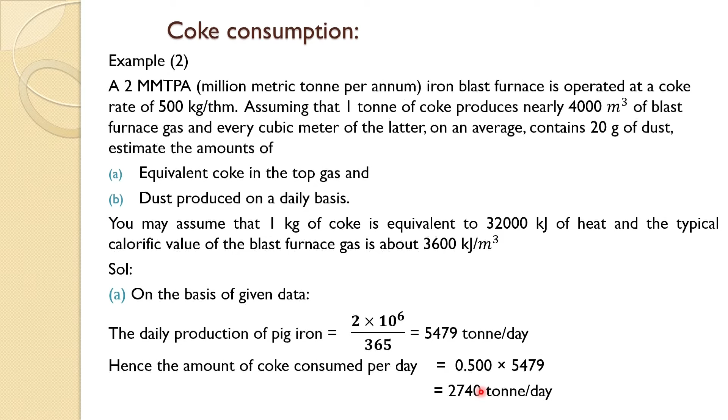So, the amount of coke consumed per day is about 500 kg, which is about 0.5 ton, into the daily production of pig iron, which will come to about 2740 tons per day. And now it is given that 1 ton of coke produces about 4000 meter cube of blast furnace gas. So, 2740 ton will give you about 11 into 10 to the power 6 meter cube blast furnace gas. And it is given that 1 meter cube blast furnace gas has a calorific value of 3600 kilojoule. So, the total calorific value of this blast furnace gas on a per day basis would be quite high, 3600 into this.

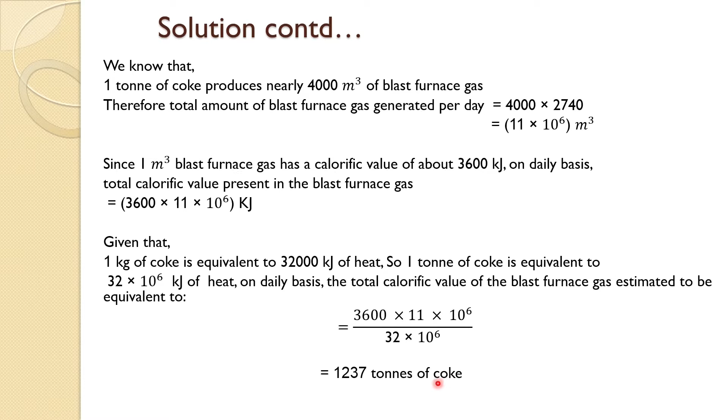Now, 1 kg of coke is equivalent to 32,000 kilojoule of heat. So, 1 ton of coke would be equivalent to 32 into 10 to the power 6 kilojoule, since 1 ton is about 10 to the power 3 kg. So, on a daily basis the total calorific value of the blast furnace gas can be estimated. It would be 3600 into 11 into 10 to the power 6, the gas which we are getting, divided by this equivalent heat. So, it gives you about 1237 tons of coke per day for the blast furnace.

And if we assume the current price of coke is about $250 per ton, the cost of it would be 250 into 1237, and if we convert dollars into rupees with an exchange rate of 60, it comes to almost 19 million Indian rupees or about 0.3 million US dollars. So, that is a huge amount. So, a small saving in this can result in a big saving in price, and that is why people are trying to decrease the coke consumption or save it.

Now, if we come to the blast furnace gas which is generated, we have already calculated 11 into 10 to the power 6 meter cube, and it is given that 1 meter cube of blast furnace gas generates about 20 gram of dust. So, the total dust would be 20 into 10 to the power minus 3 kg per meter cube, converted into tons. So, it will give you about 220 ton per day. That is a huge amount of dust generated in a day.

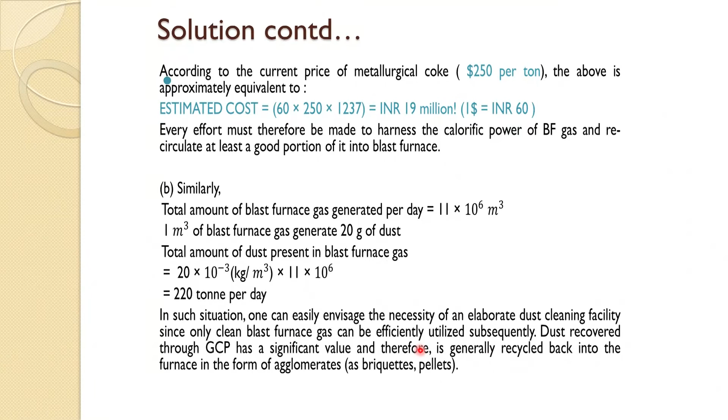You can imagine now how much dust: if we take just a very minuscule amount, 20 gram, you are generating 220 tons just from that blast furnace, and you need a very elaborate dust cleaning facility for that. And this dust you cannot just throw away; it has value, quite a lot of carbon and mostly iron ore. So, you have to use it, and that is where the agglomeration process comes into the picture. So, we will come to agglomeration.

So, we had mentioned before in this course that about 50% or more fines are generated from mining to the blast furnace in transportation, crushing, grinding, and beneficiation. All these lead to more than 50% fines generation, and they cannot be used directly in the blast furnace, as they would adversely affect the burden permeability in the blast furnace, and thus the furnace operation and its production.

Another reason is the depleting reserves of traditional high grade iron ore; there have been considerable changes in iron ore resources available throughout the world. The proportion of fine material has increased considerably in iron ore. So, now we are really dealing with more and more fines than lumpy ore. So, we have to switch to the agglomeration process, because these fines cannot be used directly.

So, therefore, ore fines are agglomerated to make them suitable as ore feed to the blast furnace, and there are two processes for this: one is sintering and another is pelletization. Sintering is restricted in its size range. So, when the size is 10 millimeter or less, down to 2-3 millimeter, you can go for sintering.

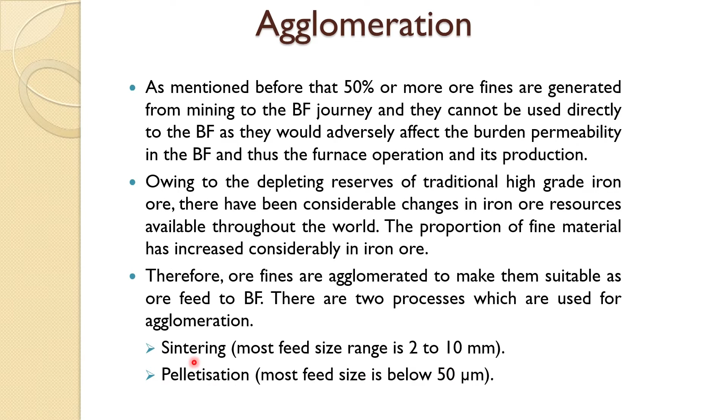So, we will come to the sintering. Sintering of iron ore is a very complex process in which various phenomena take place, such as evaporation and condensation of moisture ahead of the flame front, calcination of limestone near the flame front, coke combustion in the flame front, and melting and solidification.

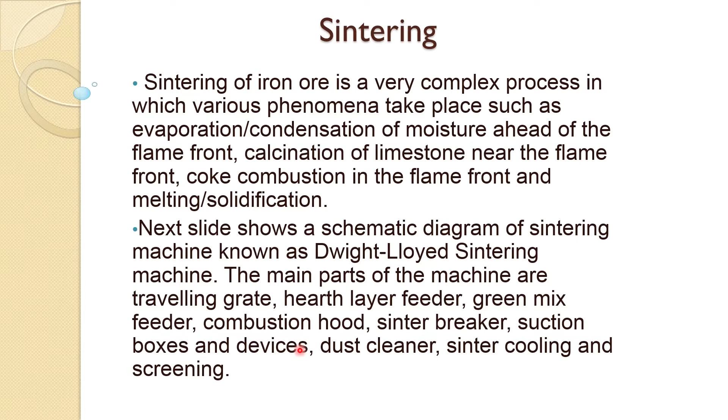The next slide shows a schematic diagram of a sintering machine. The main parts of the machine are the travelling grate, hearth layer feeder, green mix feeder, combustion hood, sinter breaker, suction boxes and devices, dust cleaners, sinter cooling and screening. So, this is a moving grate sintering machine.

So, we feed the raw material. We will describe each of these separately, but before we go to these separate things, it is necessary for you to understand the sintering process and sintering machine. Then you can correlate what we are talking about, whether the raw material, the sinter strand, the mixer or granulation, with the actual sintering process.

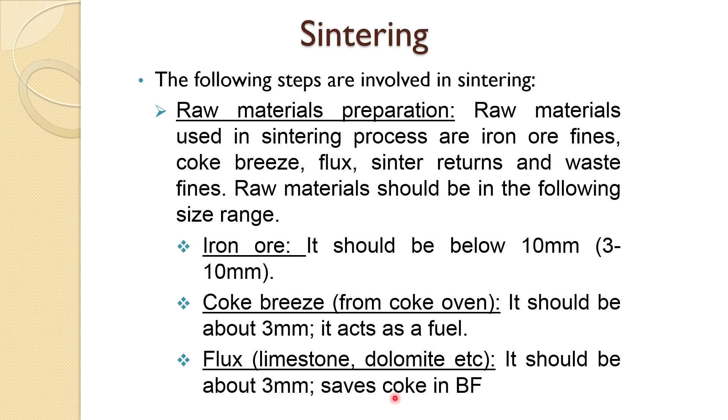Waste fines: these are the flue dust, sludge, etc., and again it should have a size of 3 to 4 millimeter. Because these are really fines mostly used for pelletization, but if you want to use them for sintering, then you make a little micro nodule form of this and make sure it is in this range. Then sinter return, as we have seen, the below 10 millimeter goes to the bin as raw material.

The next stage is the mixing and granulation. This is a very important stage in the sintering, because that is where you are making the pellets of the right size. So, all the materials are mixed properly before the start of the granulation process. So, granulation or pelletization: water content should be between 4 to 9%, but usually about 7-8% they keep it.

Granulation is a complex process in which many input variables influence the product property, like particle shape, density, porosity, surface roughness, proportion of intermediate particles, surface area of the feed, mean feed particle size, and moisture holding capacity. There are others also. So, these are very important parameters in granulation. The idea of granulation is you have to get a narrow size range product, 10 to 12 millimeter, and a narrow range, because that will give permeability to the bed.

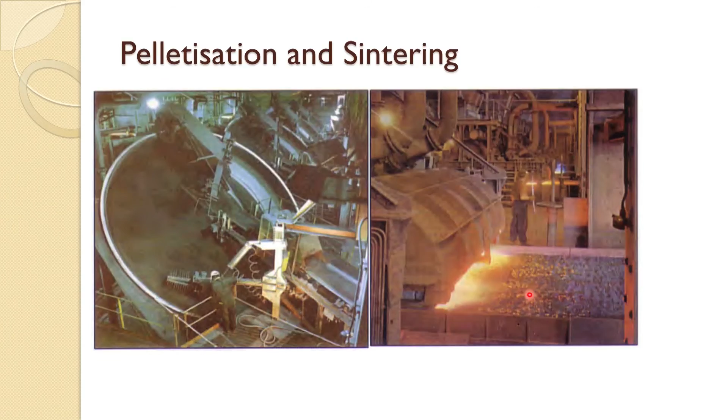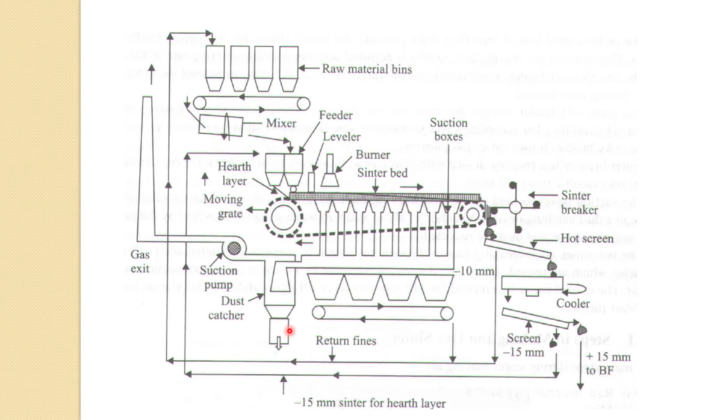If you look at this figure, when you are putting these pellets over here and the suction is being applied from the bottom, the bed should have a good permeability. If the bed does not have good permeability, your sintering will not occur in a proper way, and it will affect the productivity and efficiency. So, to make sure you have an optimum permeability of the bed, it is very necessary that proper granulation is done. The granulation process itself can be divided into two categories, wet granulation and dry. Usually in iron making we do not use dry granulation.

Granulation again is a process where you are making these fines in the form of nodules or granules of the size of 10 millimeter or more. These are used even in the chemical and pharmaceutical sector quite a lot, in drugs and tablet making. But here mostly we use wet granulation in iron and steel making.

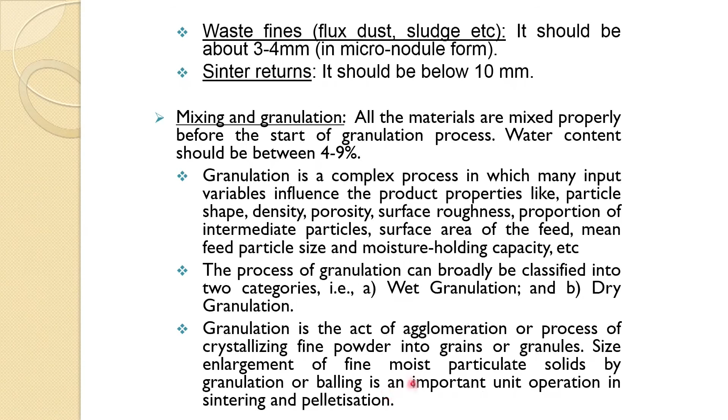So, granulation is the act of agglomeration or process of crystallizing fine powders into grains or granules. Size enlargement of fine moist particulate solids by granulation or balling is an important unit operation in sintering and pelletization.

Mostly the mechanism of wet granulation is snowballing, adhering the layer, coalescence, abrasion, transfer. So many mechanisms are there where you have a binder droplet, it could be water, it could be molasses or anything, and then surface tension and capillary effects come into picture, which finally bond together into a snowball type of structure in a finished agglomerate.

One of the mechanisms also says that the final granule size is directly proportional to the feed size, which can be given with this equation, where y is the granule size, the product, z is the feed size, and k is the proportionality constant, which depends on many parameters, moisture content of the feed and other things.

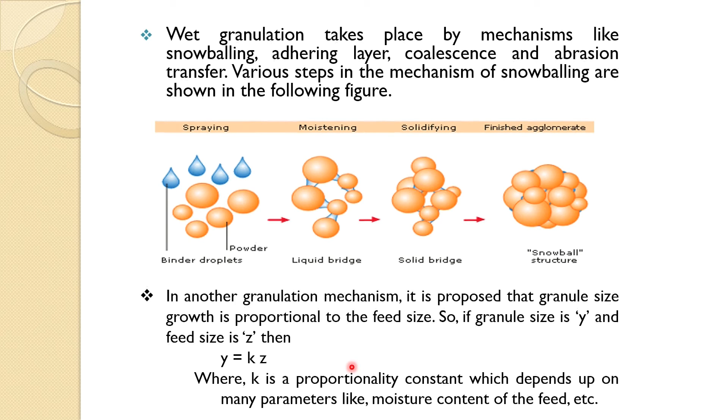So, there are various mechanisms, but there is no determined or established one which one can use confidently. Still, population balance is one of the mechanisms to describe the granulation process. The idea is to make as narrow a size range as possible from this granulation process, so the bed permeability can be improved and sintering can be done efficiently.

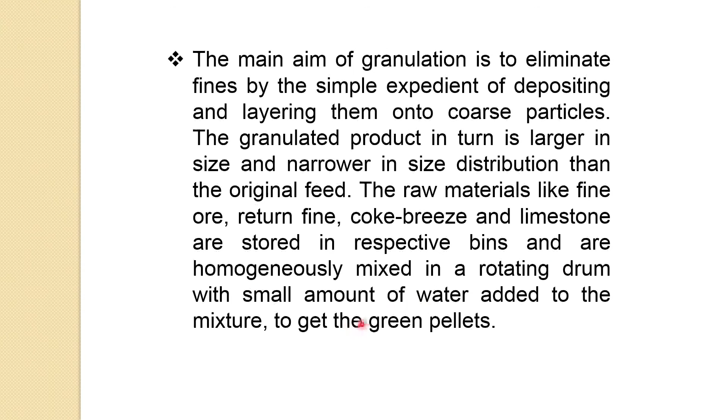The main aim of granulation is to eliminate fines by the simple expedient of depositing and layering them onto coarse particles. The granulated product in turn is larger in size and narrower in size distribution than the original feed. The raw materials like fine ore, return fines, coke breeze and limestone are stored in respective bins, as we had seen in that figure, and are homogeneously mixed in a rotating drum with a small amount of water added to the mixture to get the green pellets.

There are various types of equipment available to do that. For sintering and granulation, mostly we use the drum pelletizer or drum granulator, where the feed and the water are put together and it keeps rotating at a certain RPM, and we get the product from the other end. The disc pelletizer we have seen in that photo also: you feed the material at one end, water at another, and it rotates at a certain RPM, and the granules or pellets come out.

Similarly, you have cone, bowl, vibrating multi-cone sort of equipment to make the pellets, but these two are the main ones used. This one is mostly used in sintering, and this one is used more in pelletization when very fine ore is there.

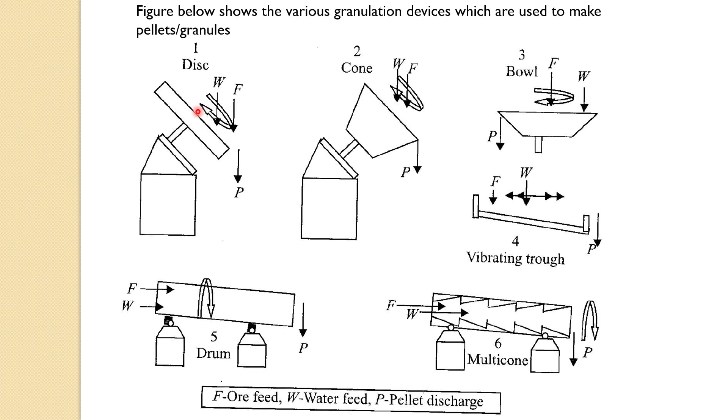And the mechanism of it: in the starting there is nucleation, because very small fine material is there, and some of these particles act as nuclei. Once these nuclei are established, the layering of small particles, other fines, starts happening with the help of what you are putting, water or molasses or something else. So surface tension and capillary force come into picture, and it keeps on layering with each rotation, and size keeps on increasing.

So, in the starting it is a nucleation growth mechanism, then there is a transition period where these nuclei are not strong enough; sometimes they break, and sometimes they keep on growing. Once this transition period is over, the growth of the ball starts. Then all the fine material keeps on depositing on the big granules, and that increases the size of the granule.

So, this is showing a bit of idea how it goes, and this is showing where you put the feed and the water, and a scraper, which removes whatever material got stuck at the bottom and makes sure these pellets follow the right direction. So, that is how pelletization or granulation occurs.

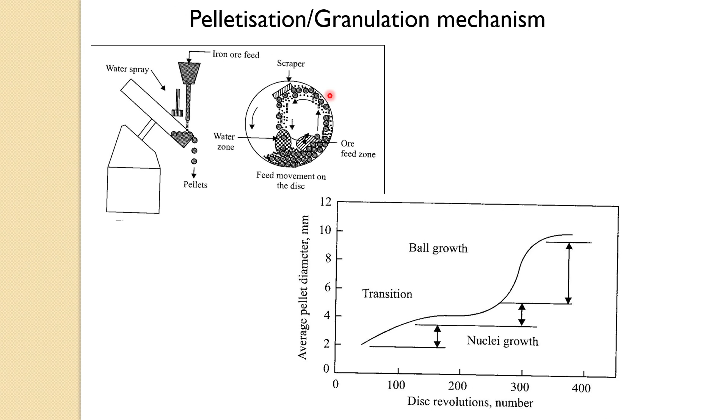Once this mixing of raw material is over, as we have seen in that figure, it goes to the feeding. These granules or green balls are fed onto a moving strand which has a thin layer of old sinter at the bottom to prevent the strand from overheating during the sintering process, and the bed height is regulated by a leveling bar.

There is nothing much in that, and after that, because the sinter strand is a moving one, it comes under the ignition hood and is exposed to the burner flame and also suction from the wind box located at the bottom, eventually igniting the top layer of the sinter bed.